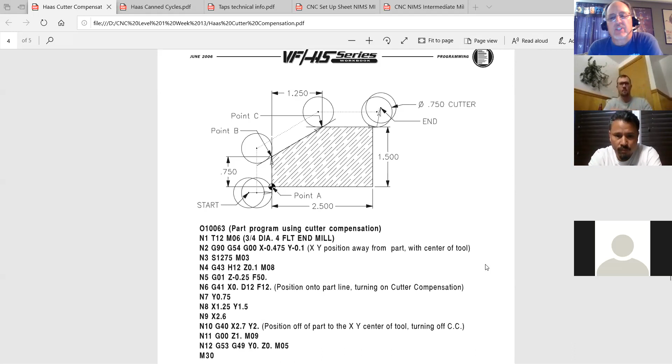Let's see, I think I have to stop sharing, which doesn't make sense to me, to share again. And it is this one. All right, do you see a print with some code on it now? Okay good, all right, so this is in that cutter compensation document, and this is an example of the cutter compensation.

So when we turn it on, this line N6, G41, that's cutter compensation left. They have an X move, so they're over here where it says start, and they go straight across. And then that's when it turns it on.

Notice the feed rate. A feed rate has to have a decimal point at the end because the feed rate's calculated in what's considered a 2-4 format. No, it's leading zero suppression, which means I don't have to put any leading zeros. So if I have nothing but F12, it thinks it's going at 1 2/10 thousandths of an inch per minute.

You're never going anywhere, at least not today. So you got to make sure you have a decimal point. A couple of programs didn't have decimal points here and there. It's just a habit. If all of a sudden you see it's going really slow, look for a decimal point missing.

So here, line 7, then they cruise around up, they go around. If we come around to line 9, which is where they're coming back, then line 10 here is where they're turning off cutter compensation and they make an X move and XY move. So they're coming off farther and turning it off.

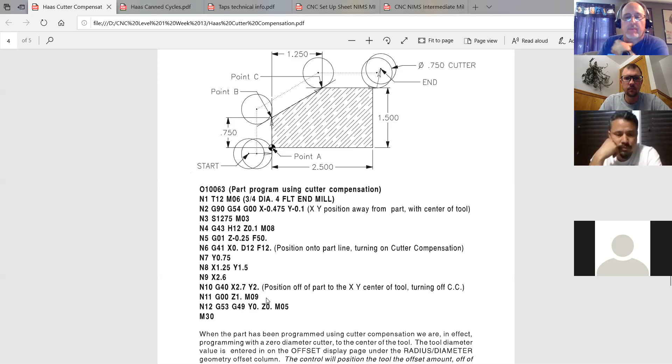So I just want you to be aware you do need to ramp it. It says down here, tool diameter must be entered in the offset. The control will position the tool.

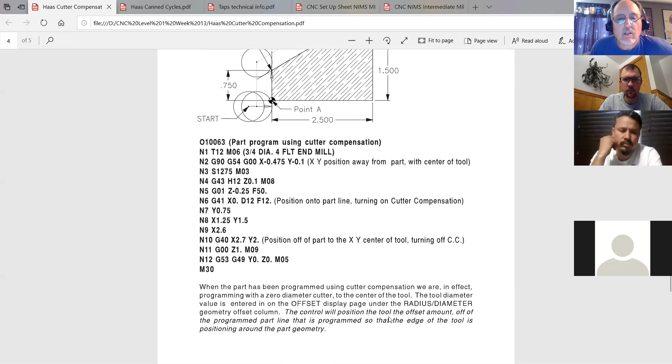No, that's not the one. Somewhere I saw a note that said something about a move. Which one was it? Needing an X move. Needs an X or Y move in order to truly shut off, especially if you're going to do multiple depths.

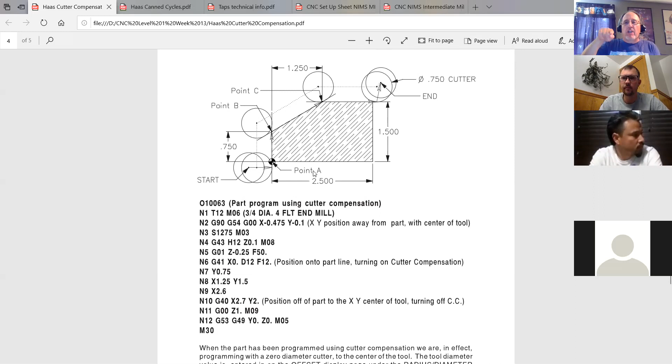I'm going to go around one time. Let's say the block is really thick. I'm going to rough it out in a couple of steps. I'm going to go down a half inch, then I'm going to go down another half inch. You can use the same program, but you have to come off cutter compensation, go back to your start point, ramp back on cutter compensation every time. Otherwise, it's going to give you a problem.

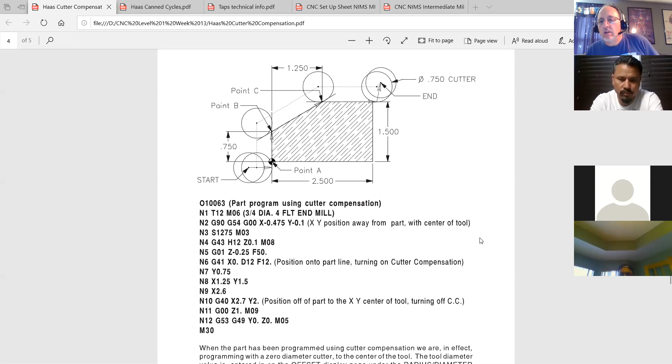Oh, I didn't know he was in the waiting room. Let's see. Okay, you're back with us? Yeah, I lost audio and my internet connection was, I think, going down. Well, it was good because it popped up on my screen that said you were in the waiting room. Yeah, so I ended up just leaving and reloading my browser. Sometimes that's the only way to go. But do you guys see pictures of you on the side of my screen, or do you just see the white screen? I see pictures. You do. Yeah, so when I see that, I don't really know, and it doesn't tell me who's in the waiting room.

So at any rate, the main thing I was trying to say was you need to make sure you have an X or a Y, or an X and Y move, on that G40 line to make sure that it cancels it out. So that's my main pitch reminder about the cutter compensation.

So if you're ever having trouble getting it to work on the machine out in the shop, look at: do you have enough room of a ramp to handle that diameter cutter? Do you have a diameter or radius, depending on the machine, entered as an offset? And did you call the cutter compensation the right way?

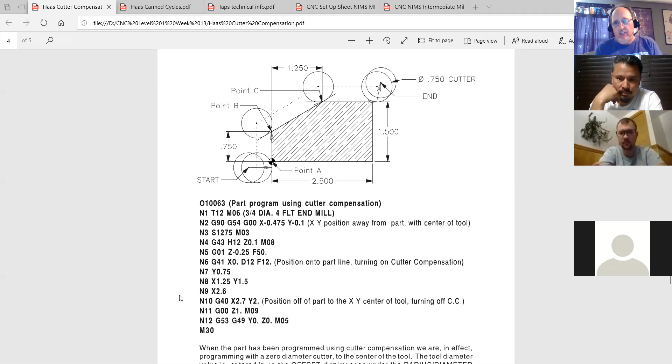Any questions on cutter compensation? Kind of makes sense. It's really, once you get the hang of it and you kind of treat it the same way all the time, it's usually fine. It's definitely better than programming without it.

Now, I will say that a lot of times on CAM software, you have the option to choose whether you want it to be compensated in the control or in the computer. And if you choose in the computer, it automatically shifts it based on the diameter of the tool you put in, and then it puts out those numbers based on that shift. The downside to that is it doesn't really turn on cutter compensation. And like I said, if I had a 1-inch end mill, I broke it, and all I have is resharpens now, my part's never going to be the right size unless I go back and fix it, because it doesn't have cutter comp.

I recommend cutter compensation all the time. But if your company does something different, then you go with that. All right, so let's talk about canned cycles.

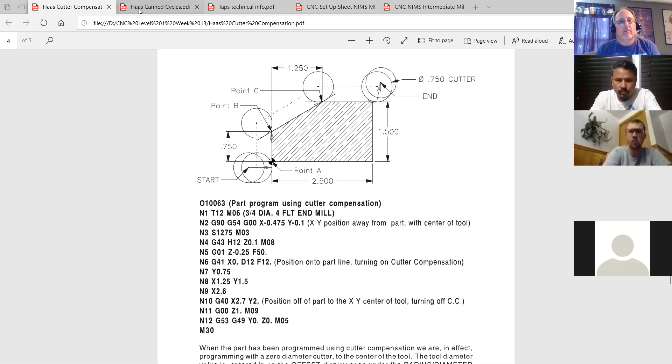So we're drilling, tapping, boring. Those are G81 through G86, the most common ones. G80 cancels it. And it really makes your life a whole lot easier. So basically, you're going to position in X and Y.

Looks like I was having a seizure there. I was like...

You're going to position above, and then you're going to come down. So typically, once you make a tool change, you want to make it a habit to position up above before you call out the G81 or G82 or G84, whatever you're going to do.

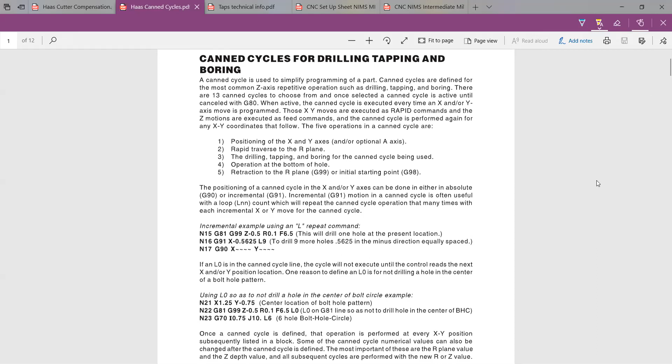So what I wanted to show you was there's G99 and G98. So when it comes out of the hole, depending on if I use the G99 or a G98 - and if you look at your book, I believe G98 is the default code with the asterisk - when it comes out of the hole, it's either going to go to the R plane, which normally you have like 100 thousandths above the part, or it's going to go to the initial plane.

So in this example here, line 15, G81, so it's a drill cycle. It's going to rapid to the R plane, which is R 100 thousandths. It's going to then feed at 6.5 inches a minute down to minus half inch. And when it gets down there, it's going to rapid back up to this R plane. If this was a G98, it would go to wherever my initial plane is.

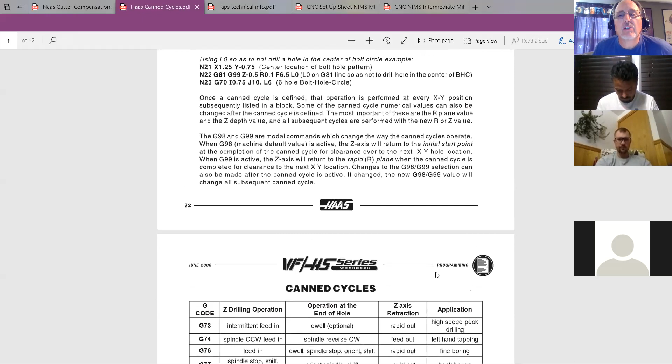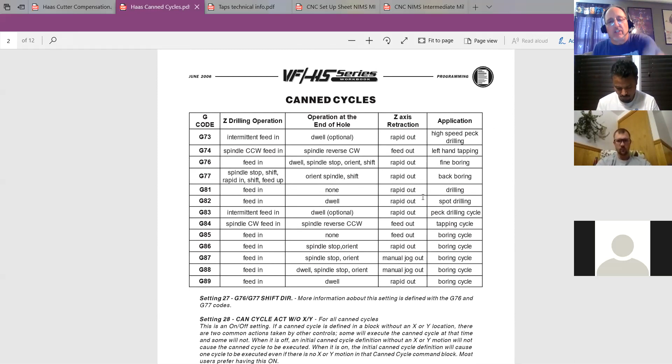Let me see if they have an example on that. Page 2 has a list of what happens when you pick that. G81 feeds in, end of hole, nothing happens, it just rapids out. So this kind of breaks down the parts of the canned cycle.

G80 cancels it. I'm looking for G98. Oh, here we go. Here's a good example. So G98 - now, G98 and G99 are modal, so they stay that way until you change it.

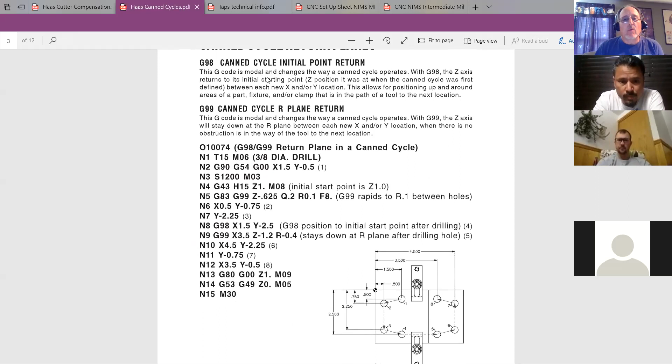So if you don't put one or the other in there and the default's G98, and when I come down, that initial plane is the first Z. So look at line 4: when you come down to length offset, turn on H15, so it's offset 15, 1 inch above. So the initial start point is 1 inch. That means if you have a G98, like there is on line 8, when it comes out of the hole, it's going to go to 1 inch above the part. Okay.

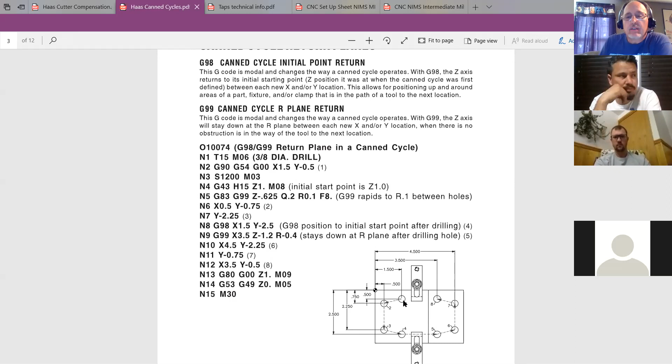If you look at the picture down here in the corner, my screen doesn't get blocked. There's a clamp here, and you can't always go around the clamps, especially if you remember when you're going from hole to hole, it's going at a rapid. That means it's going at a 45-degree angle until it satisfies one of them. So if I was going from the upper left-hand corner to the lower right-hand corner, it's going to go on a 45 until it satisfies one of them. So, to think that I can go from this picture of hole 1 to hole 7 or something like that, it's probably going to clip the clamp. So I would use the G98 so that I could jump the clamp. Okay.

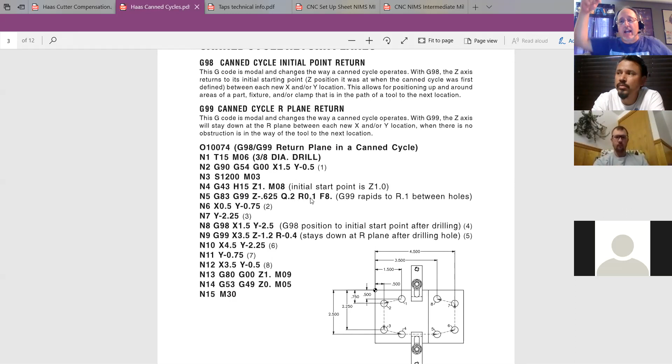As a rule of thumb, whenever you program, I highly recommend that when you pick up your tool length offset on the G43 line, you use 1 inch as your Z instead of 100 thousandths. What happens is it rapids to 1 inch, and even if I was drilling a hole right away, it's then going to rapid to the R plane at 100 above the part. So you're not feeding from that 1 inch above the part. It's not wasting a lot of time, but it sets things up so that if you need clamps or something, you can work around it.

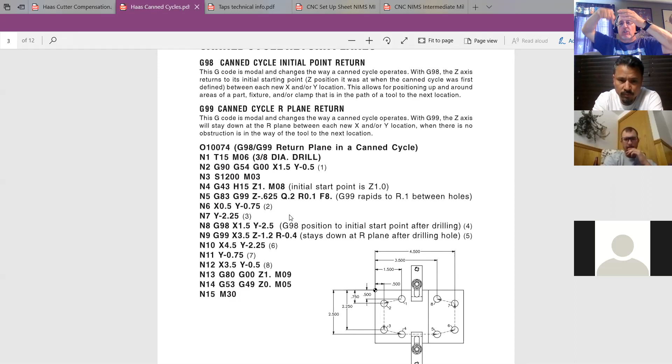Another thing is sometimes you have a pocket and you have to put holes in the bottom of it. You might want to use G98, that initial point above the part, but your R plane might be negative inside that part. So it rapids down, feeds in, drills a hole, and comes back up completely out of the part before moving to the next hole. There are a lot of scenarios where G98, G99 come in handy, but it all gets set up by this first Z move when you turn on the G43. Make sense?

Once you're in a canned cycle, G73 through G89 - 81 through 86 are the most common - every X move or Y move or XY move is going to execute the same canned cycle that you initiated, until you come down and give it a G80 to cancel it. So that means it's drilling a hole here, here, here, here, here.

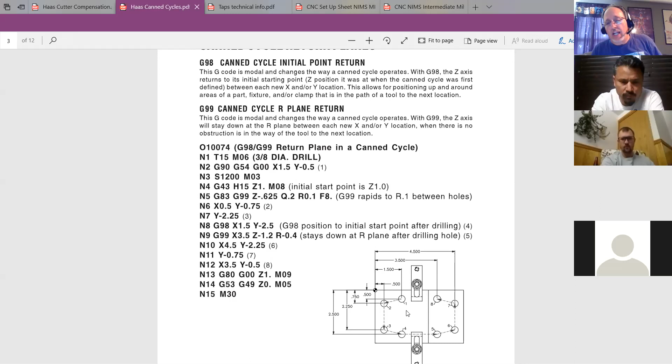Notice they changed from G99 to G98, and they numbered these in this example. So line N6 is hole number 2, then hole number 3, then they went to hole number 4, so that when it comes out of hole number 4, it's going to go up to the initial plane, which is 1 inch. So that G99 to G98 happens when it comes out of the hole.

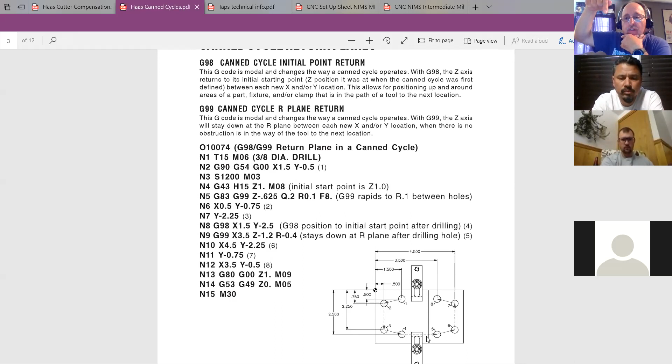Not going in, when it comes out. So on hole number 4, when it comes up out of the hole, it's going to go to 1 inch above, so that when it goes to the next hole, which they made a G99, at that 1 inch above it's going to go to hole 5. It's going to rapid down to the R, drill the hole, and come back up to the G99, which is the R plane - not up in the air. It's going to stay close to the part the whole way around. So that's how you use G98, G99 to control it.

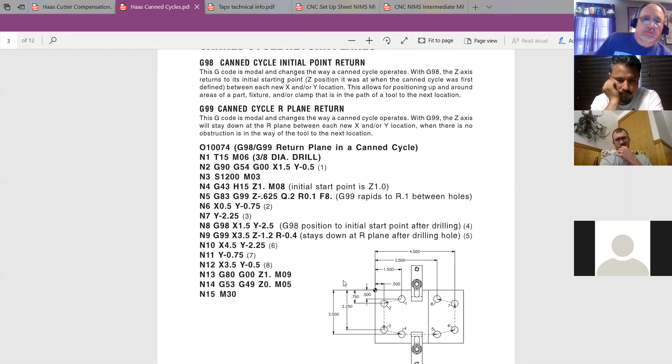Honestly, a lot of times you're only doing G99 because you want to keep it close - you set that once. But if you make it a habit to have the initial plane be 1 inch, then if something comes up and someone decides they have to add a clamp, you just add a G98 to the line and change that, and everything's happy. Make sense? Good.

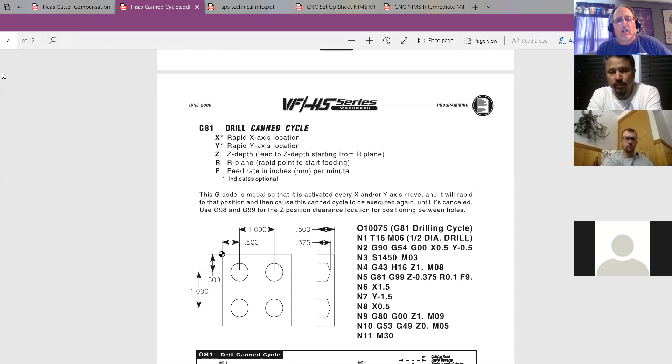So are you guys familiar with how the different G codes work? It's actually kind of like multiple steps all put together in a little routine.

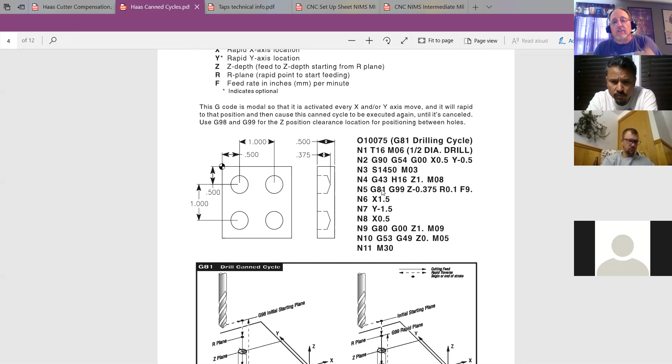If we look at this one, line 2, they positioned at rapid to X plus .5, Y minus .5 - that's where they're putting this hole. They turn on the spindle, rapid down, pick up the offset with the G43 to 1 inch above. They decide to use G99 on all the holes because it's all down. It drills a hole there, even though there's not an XY on this line.

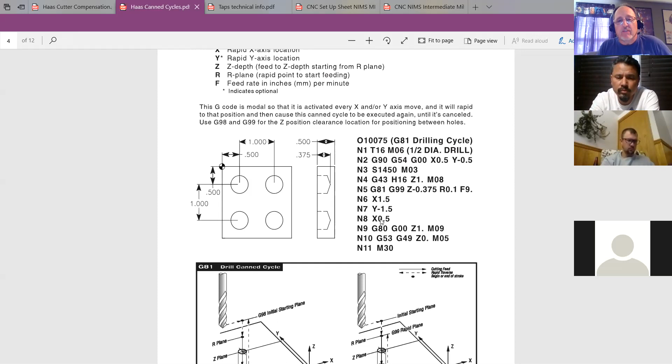Sometimes if you're writing manually, or even with CAM software, a lot of times it'll spit out this X and Y position again on the line because it pulls it - that's just the way it's written. You don't have to, because it's already at that position when you turned it on, but all the rest of them, every position, it's going to drill a hole. So if we look at this, let me see if I can make it bigger.

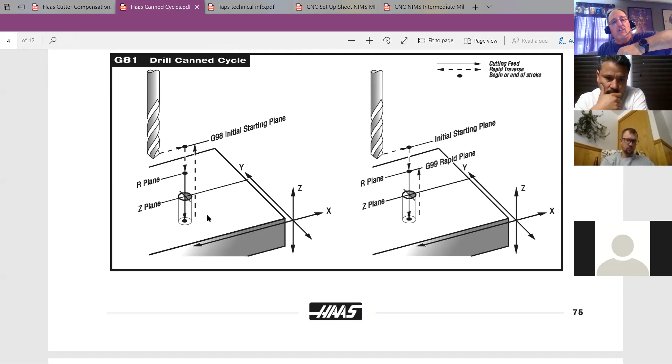If we look at this drill, here it's using the G81, a drill cycle, so that's just a straight down motion. It's going to the initial plane, which is 1 inch above, then rapid to the R plane, feed to Z minus, then rapid back up. In these pictures, the dashed lines are for rapid, and the solid line is for feed. That should help you out if you're looking at any of these later.

So it's rapiding over in X. This one rapids down to the R plane, feeds down to the bottom of the hole, and rapids back up to the R plane. Each one of these canned cycles has a little picture like this.

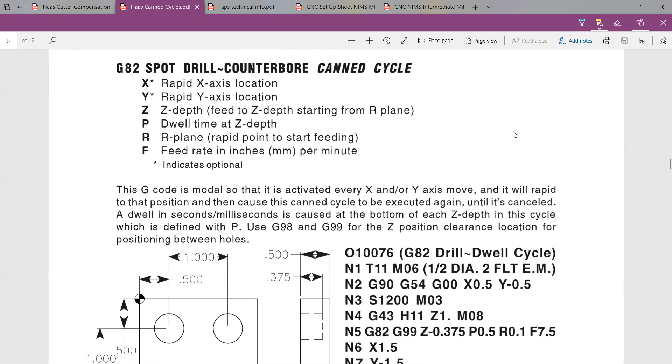G82 is a spot drill, which is basically just like a drill, G81, except there's a P. And that P is time at the bottom of the hole, okay?

So in this example, line 5, N5, G82, spot drill, it's at the rapid plane, it's going down. When it gets to Z minus 375, it's going to dwell for 0.5 seconds. It says a dwell up here is in seconds, milliseconds. So it's a half a second, it's going to sit there and it's just going to spin.

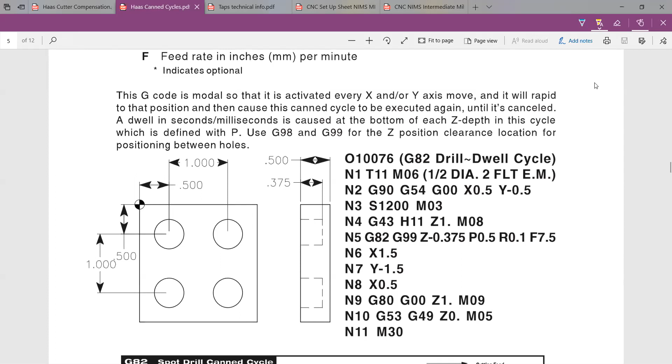Then it's going to come out of the hole and go do the next hole. And again, they kind of show us the same thing.

When you get to the G83, it can be simple or you could make it complicated if you'd like. Which, if I'm drilling, let's say I'm doing a mold and I got a water jacket and I got a really long hole, you know, that's 5-6 inches deep or something like that, I might use some of this extra stuff.

So normally you're positioning with X and Y. My Z is my final distance. My R is my rapid plane. My F is my feed rate. I can put a dwell in here so that when it gets to the bottom of each peck, it'll stay there. Usually I find that just makes chatter, which I don't want.

Q is the peck, equal increments, if I'm not using I, J, and K. So most of the time I'm just using a Q, and whatever my Q is, like 0.1, 100 thousandths, every 100 thousandths in Z, it's going to rapid it back out of the hole, rapid it back in just short, and feed down another 100, rapid out, rapid back in, feed some more. I'll show you the picture in the middle.

The more complicated version is if you add I, I can make my first peck bigger, and then J, I can make it less each time after that. As I get way deeper in the hole, I got way more stuff packing up on my flutes, so I may only want a 50 thousandths peck as I get really deep, but when I'm first starting out, I may want a 200 thousandths peck. So that's where you would get into those different type things.

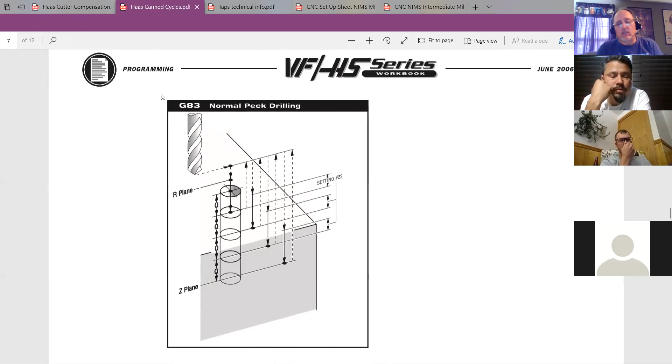So here's a picture of how it works with just a normal XY, going to the R plane and using Q. So here's Q. It rapids, feeds down the depth of Q, rapids back up, rapids back down just short of the hole. And over here it notes that this is setting 22.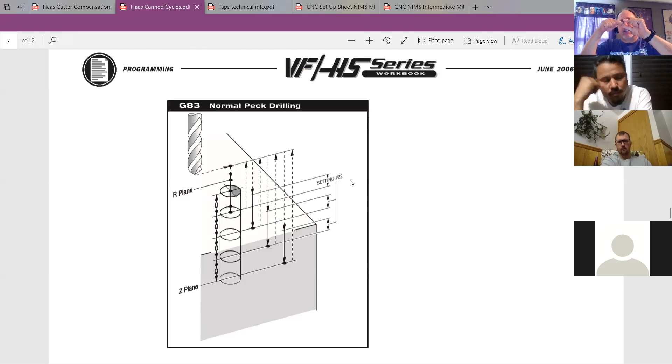So in your control, there's a setting page, and there's a number that's in there. There's a factory default setting. You can go in and change it, but that says how far is it going to stop before it gets to the bottom of where it left off drilling on that last peck. It might be 10 thousandths or 20 thousandths or maybe 50 thousandths, I don't know, it kind of depends. But that's just so that it kind of doesn't smash into it.

If you were doing a small drill, you'd end up breaking your drill. So each peck is going to go down to whatever the Q number is. It's going to rapid all the way out of the hole, rapid all the way back in, just short of where it left off, feed, rapid all the way back up. So that's peck drilling, sometimes they call it deep hole drilling.

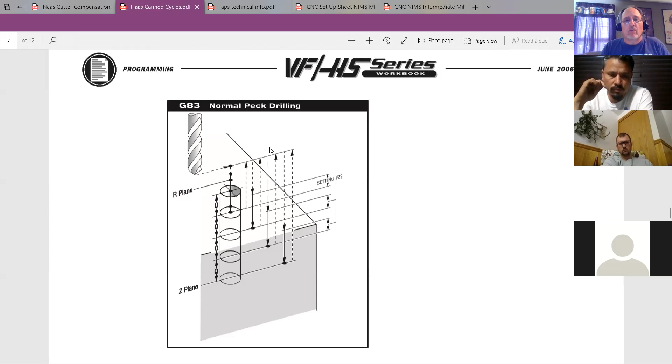There might be another option on your control that's called chip breaking, where it just kind of almost pauses - it's like e, e, e, e, e, e, e. It doesn't come all the way out of the hole, it just kind of pauses and keeps going down. Sometimes that's fine if you're not going really deep and you're just kind of blasting, roughing out a hole. That works fairly decent.

Okay, so I mainly want you to be thinking about using the Q when you drill. In our drilling exercises, don't go crazy unless you feel like you want to experiment with it. If you write the program in the NC viewer, it's not going to show you any Z. It really doesn't show you much, but you could look at it on your computers at work possibly.

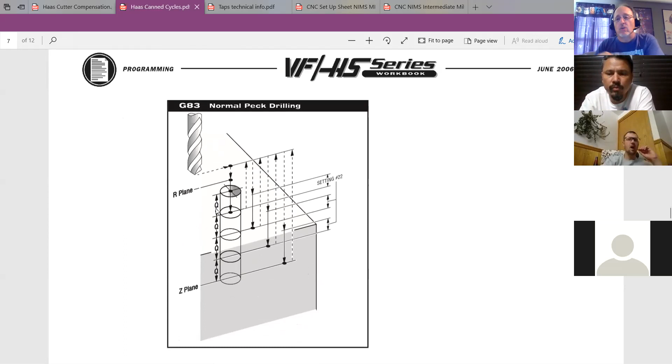So I would just worry about doing a Q. When you do pecking, you have to use the G83, right, instead of G81? Correct, correct. So G83 is the peck drilling, and you have to have a Q. You're still going to have your R, your Z, your feed rate, XY position, and then you need to have the Q. A normal size is like 100 thousandths, depends, you know.

And it's easy to adjust because oftentimes, let's see if they do it. Let's go back up here. Oh, we should go down that up. In the code, the G83 line here, number 5, they got a Q of 0.5, so a half inch.

But notice they don't have a Q on the next line. It's modal, which means it stays that way until you tell it a different number. Even to the next tool. The next tool, you call up a G83 again, it's still going to remember that Q unless you change it.

So the nice thing about that for this tool is, let's say I had 10 holes, but I only put the Q in line 1, this first line, and I go and figure out, holy cow, a half inch, no way, that's not going to work. The chips are way too big, they're flying all over, coolant's not getting in the hole, I need that to be smaller. You only have to go to this one place and change it. Whereas if you put a Q on every line, you'd have to change it every time. Does that make sense? You'd have to change it on every one.

Now, let's say I got a couple of short holes and then I have a long hole, okay? You may want the Q to be a little bit longer on the short holes, but when you go to a long hole, you may want the Q to be shorter so that it breaks the chip better. So let's say this next hole is longer. You can just change the Q, add a Q, Q.1 on this other line. It's flexible like that.

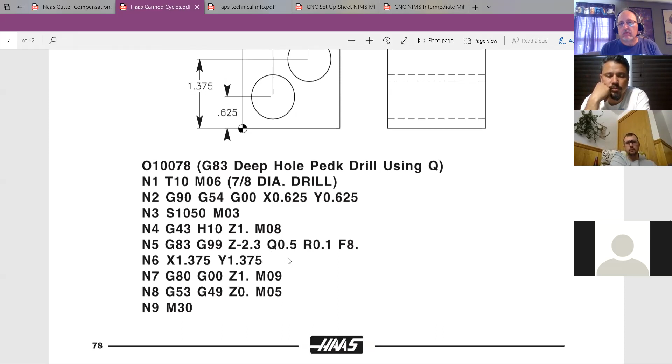Are we okay with G83? Makes sense? If you want to get into this other stuff, I'll let you go look into it. It's a little bit more complicated. You're going to have to read through it. But for the nuts and bolts about what we normally do, the G83 with the Q works very well.

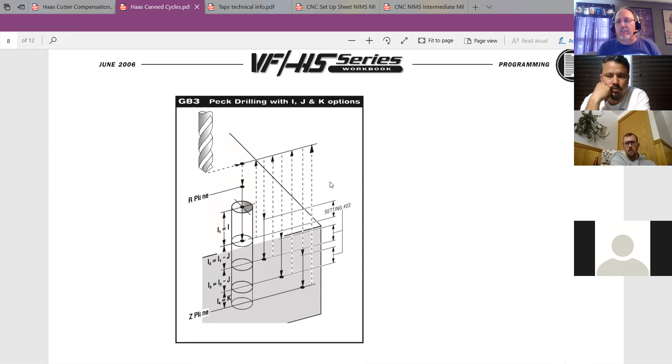Tapping. Let's see if I can minimize you guys. So tapping works the same way as far as an X, a Y, an R, a rapid plane, a Z, and a feed.

This J is kind of... I've never used J, I'll be perfectly honest with you. Okay, the tapping retract speed. So there's two kinds of, let me say, tapping modes on your machine. One, it has, let me stop sharing this for a second, just because.

Okay, so there's two kinds of tap holders. There's two kinds of tapping. There's tension compression, which is, I'll use my water bottle maybe, try. Here's my tap, okay? So there's a spring in here. And so as I'm drilling and tapping the hole, its spring can extend or it can push in, okay? The reason it was set up that way, old machines are that way because they are not as accurate about their feed rate, okay? So if it's not a perfect match in the feed rate, let's say I'm feeding too slow, it would pull the tap out a little bit instead of breaking it, okay?

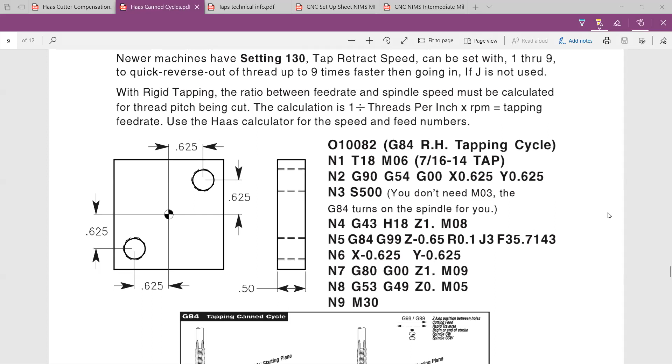Would you be getting your RPM from like the machinist handbook? Yeah, so yes, I would probably look at something for tapping, and it might say, okay, I've got a high-speed steel tap, 200 surface feet. I'd figure out as a quarter inch, 200 surface feet, then I would do the 1 divided by threads per inch times that RPM. Now, in every machine there's a maximum feed rate you can go, and it depends on the machine - it might be 30 inches a minute. I don't remember offhand if there's a standard number.

Either that, or you're going to go from the tap manufacturer. If it's an OSG plug tap, you're going to go look at OSG, and they're going to tell you what they recommend. One of those two sources would be the ones to get that info.

It kind of depends on your tap too, and I have a document that I've shared, and we'll go look at after this, about the different types of taps, because it makes a difference, because you have to determine how deep this tap is to go.

So if I'm drilling a hole a half inch deep, and let's say I want 3/8 thread, depending on the type of tap, I might have to make that hole like 3/4 of an inch deep. And if I can't go that deep because of the part's specs, then I might have to get a bottoming type tap, or one with little to no lead on the tap, and I'll explain that better in the next document.

But when you're tapping and drilling the hole to be tapped, you need to know how many threads do I need? I need a half inch of full threads. Then I have to calculate what my lead is, and then calculate some room, because most normal plug taps are going to push the chips into the bottom of the hole. So if it's a blind hole that doesn't go through your part, those chips are going to pack up at the bottom, so you want to leave some extra room.

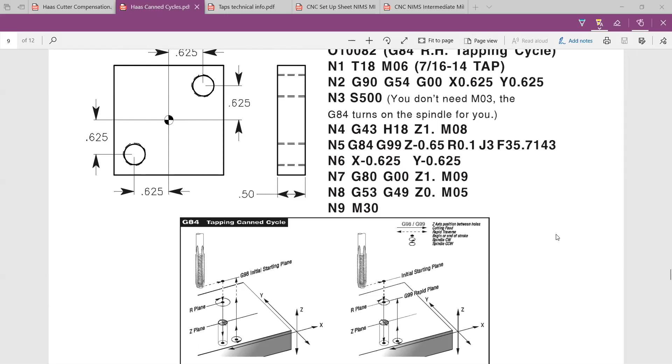So how this really works is this tap is going clockwise, M03, to the XY position. Then it's going to rapid to the R - can you see my little arrow guy? Yeah, okay good. And then it's going to spiral down, spin and move down in Z until it gets to the bottom of the hole, to the Z. It's going to then stop the spindle and reverse it to M04, spiral its way back out to the R plane, and then change the spindle back to M03.

So a couple of things. When I'm tapping a hole, if I put it on single cycle, it might have to push cycle start a couple of times because it might move to the XY position, then I might have to press cycle start again, and then it matches the RPM, and then I press it again and it spindles down and stops at the bottom of the hole, like it thinks that's the end of the block. It'll sit there - it's not spinning, so it's not a problem. Hit cycle start and it will retract back out and reverse the direction. So depending on the machine, it might break that one little cycle up into several chunks. Does that make sense?

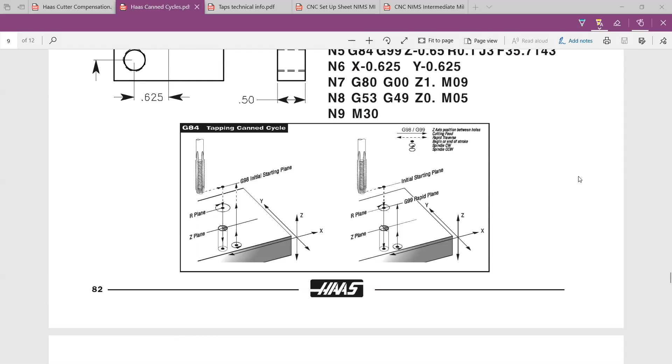One other thing - once you execute this G84 command, feed hold does not work. Feed hold, feed override, spindle override, none of it works. So let's say I've been running my spindle at 150% and my feed rate at 50% because my programmer doesn't know what he's doing, whatever - I'm not at 100%. When it comes to tapping, it's automatically going to use the numbers that are in the program, even if you really want it to be different. It locks those out - you can't override the spindle or feed rate in tapping mode, which sometimes is really good, because if you've been playing with the speeds and feeds and forgot to change them, it would for sure break a tap.

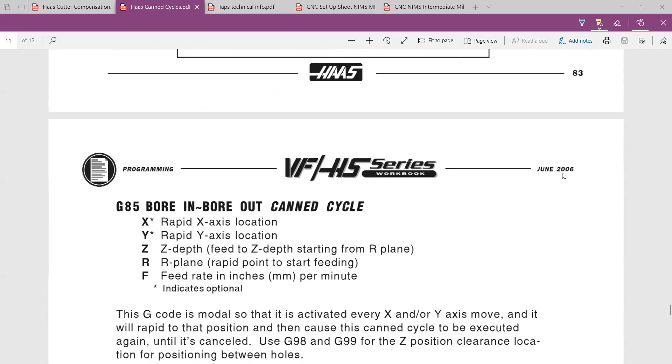G74 for left-handed taps, same process. There's a couple of different options for boring. Here's one, it's bore in, bore out.

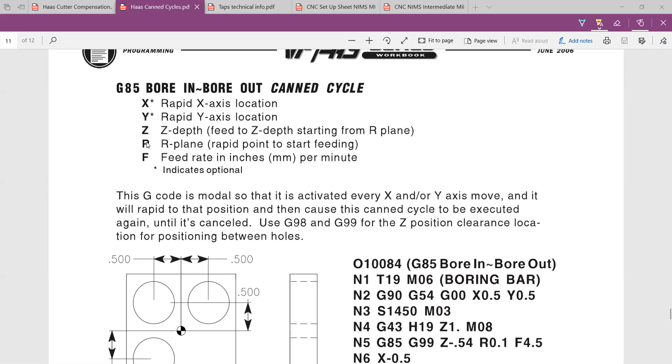So it's going to bore in, same thing as a drill, X, Z, F, R, okay? It's going to feed all the way down, and then feed all the way back up. So it's going to bore itself in, bore itself out at the feed rate.

G86, what's going to happen? Oh, this is still the G85 - it feeds in, feeds all the way out. G86, it bores in, stops, rapids out.

Sometimes, if you cut it again with zero tool pressure, it sometimes does weird stuff, depending on the material. Other times, maybe if you got a super hard material, you may want to bore in and bore out to make sure there's no tool deflection. That's a preference or an experiment.

So those are the main ones. There's a few other boring options, and they're in your book, and you can look at them. They're also in the full-blown Haas manual that I gave a few weeks ago. It's up there, and I'm not taking that stuff down. So even after our class is done here, you'll be able to go and get that stuff. But I would pull it down as PDFs and save it so you don't have to go there anymore. Anyways, it's less convenient. So, questions on canned cycles?

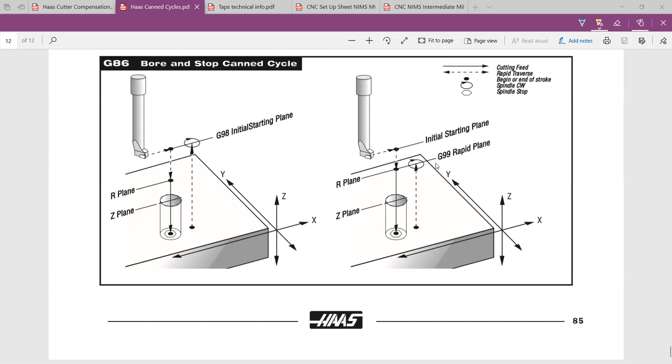Okay, so let's look at some of this technical info for taps. Let me see if I can make this big enough to actually see. All right, so there's a number of different types of taps.

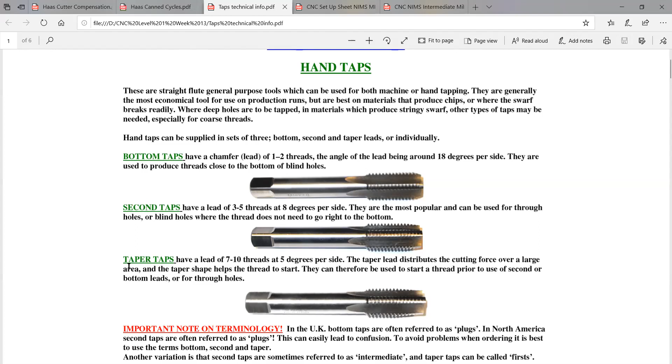So there's a bottoming tap, the chamfer on the bottom here, or the lead, they say is 1 to 2 threads. A second tap has 3 to 5 threads. Tapered tap has 7 to 10 threads that are lead.

So if you look at this, it's kind of hard to see maybe, but those aren't full threads. So what they're saying is the first, in this particular one, 7 to 10 threads aren't going to make full threads. So if I were to screw a thread of screw into that hole, that screw is going to stop somewhere here. It's not going to make it down to here.

It's going to get closer to the bottom on this one. So sometimes you're going to tap a hole with something like this, a plug tap, a regular standard tap that has a bunch of lead like this. And then you're going to hand tap it off onto the side because you got to get down to the bottom and you don't want to risk busting a tap.

Now these are hand taps. Machine taps work kind of the same way. We've got a spiral point or a plug tap. Does it tell us how many threads? I don't see it.

I think in the machinist handbook or let me see real quick on the Haas. Oh, remember when we were talking about threading with the G84 on tapping? And I said that it's 1 divided by threads per inch times the RPM. If you're doing, so 1 divided by threads per inch, let's take the 1/4 20 tap, 1 divided by 20 is 0.05. That's the pitch.

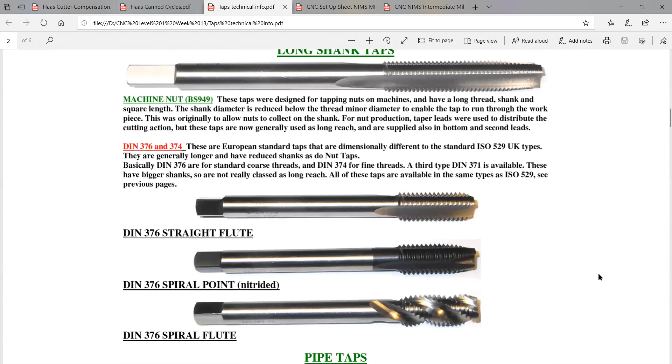But you've got to have different size drills that affect this. But roll thread taps are useful. Long taps are the same thing, just different sizes - they're just longer. Pipe taps - you could have a straight pipe tap, or you could have a tapered pipe tap.

They could have different coatings, like these in the pictures, like a nitride coating. Depending on the material, you might want a certain kind of coating on it so that aluminum doesn't stick to it and build up and cause problems in your threading. Titanium nitride coating, kind of the same thing.

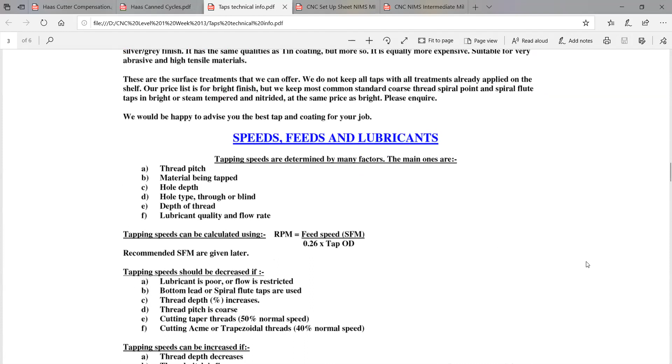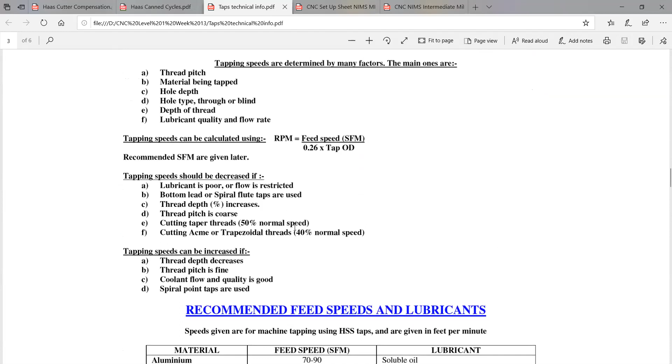Here's some info about RPM or tapping speeds to be calculated, surface feet per minute. I don't know whose chart this is, to be honest, but here's some examples of surface feet per minute for the different types of material.

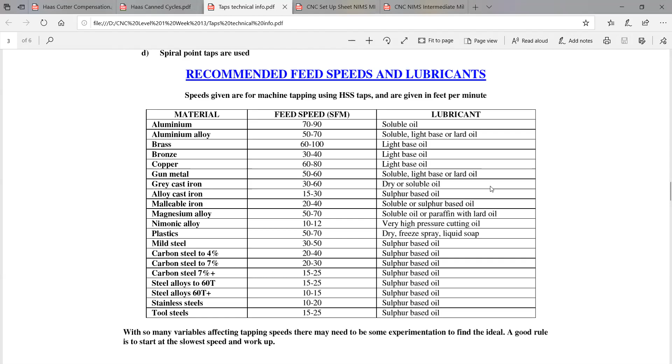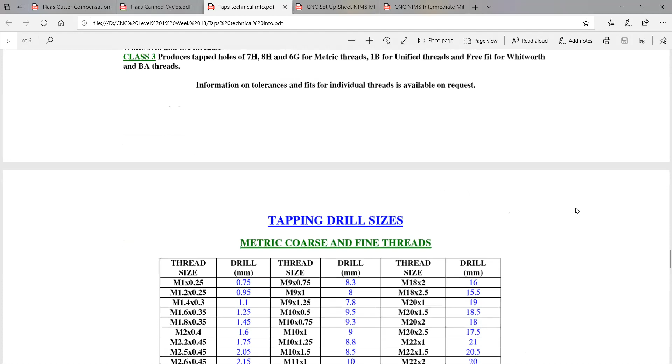Some troubleshooting, some tap terminology - I'll let you guys study it when you're interested. Metric tap size. There's some tap charts tied with this too, which I had forgotten about.

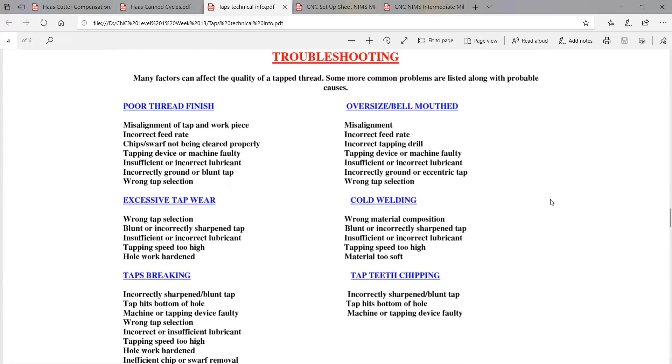Questions on taps? That's a nice handout. Yeah, that's not too bad. There was more in there than I thought. I thought it was just this, so I must have gone and found some more stuff and put it together - I have a tendency of doing that. Maybe not, but yeah, I like this one. There's a good amount of information. Yeah, there's some decent information in here. So that's free.

All right, so if we look at this - most of you, or many of you, programmed this outside shape. If you didn't do that, you might want to work on that. What I would like us to do this week is drill and tap these holes. If you get that done, you might want to slot this out, and we'll talk about that in a minute.

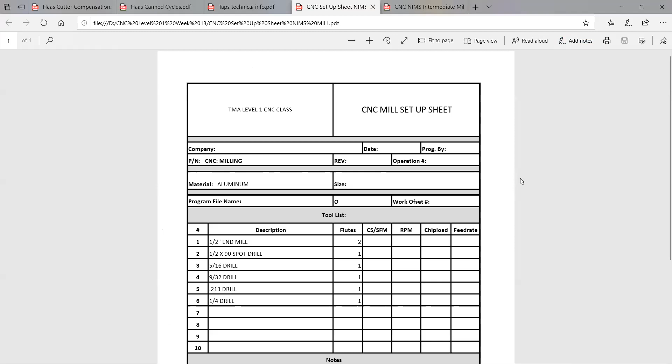So these holes are listed over here in the chart on the side. Typically, one way or another, you should be making some sort of setup sheet - plain, like just a list of tools on a piece of paper like we did on the lathe, or something more official. If you're a programmer, you should come up with something formalized and consistent so your operators can get to know where to look for information.

So that they're not losing a lot of time on the floor trying to figure out what the heck you're doing. Okay, so this is one Titans of CNC has - I downloaded it and modified it to use with my students at school, so I just took my school logo off and did it for us.

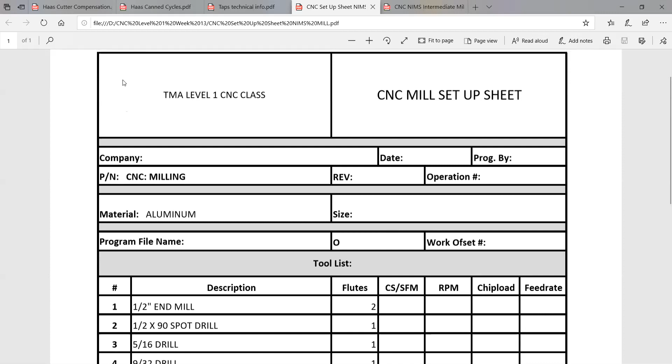The reason I did this is because if we're milling - let's mill with the half-inch end mill around the outside, we're going to use a half-90 spot drill. Anytime you can, use a 90-degree spot drill, and the reason is because whatever diameter you want, the Z is half that amount.

So if I've got a 250 hole that I'm drilling, you really should be making a spot so that there's a countersink, so I don't have to deburr it later. I don't like to work more than I have to. So I'm going to program that to maybe be 280 diameter.

So my Z is going to be half of that, 140 deep. If I use an 82-degree spot drill or something else, you'll want to consult your Haas handbook to figure out that distance. But with a 90-degree spot drill, it's nice and easy - the Z is half of the diameter I want. That's why I said 1/2-inch spot drill.

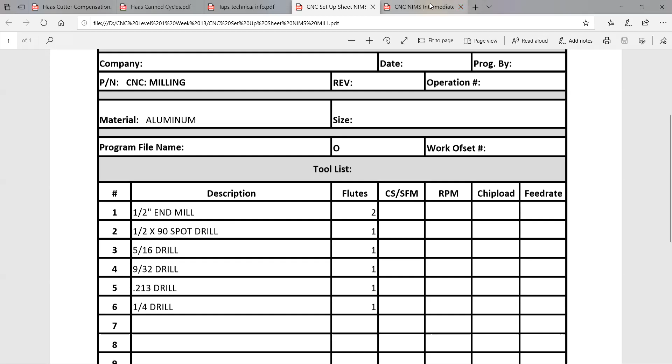We're going to use a 5/16 drill. Now, I'm going to be honest with you - in reality, if you look at these tolerances, hole A, 312 plus or minus 2 thousandths, you're not drilling that with a drill blasting in there one time and holding plus or minus 2 thousandths tolerance on the diameter. That's probably a reamed hole. Same thing with the 281.

But for our purposes of programming, I want you to use a peck drill, G83, to drill these holes. Just drill them. Now, since I mentioned ream, let's say I drill this hole - I would probably drill it somewhere around 300, whatever size that would be, and then I would ream it.

Now, if I ream it, I would use a G81 cycle - drill in, rapid back out. When you ream a hole, since you want it round and smooth and a consistent size - using a reamer to true up a hole and hold tight tolerance and size - you're going to go with a lower surface feet and a higher feed rate, because you want it to go in and cut and come out, not just rub. You want to make sure that reamer's not wobbling, because if it's wobbling, it's going to cut oversize.

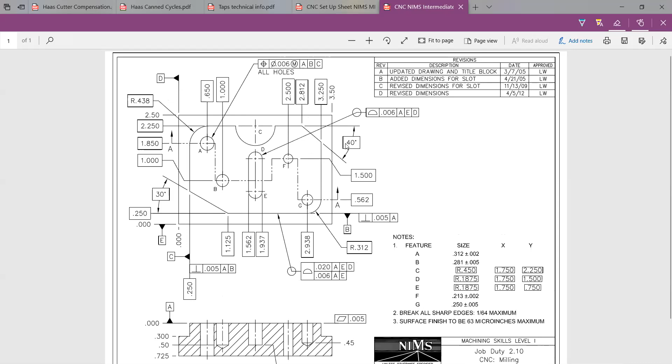Are you guys familiar with geometric dimensioning and tolerancing at all? GD&T? A little bit. Like this stuff that's on this print - let me make it a little bigger here. Do you know why these dimensions are in a box? And not all of them are. So here's one that's not in a box.

So I'll touch on this a little bit. GD&T is like a whole other language. Okay, so we look at our print - I have tolerances down here in the bottom. Two places to the right of the decimal, plus or minus 10 thousandths. Three places to the right of the decimal, plus or minus 3 thousandths. So this 0.45 right here is plus or minus 10. Over here on the left, there's 0.300, plus or minus 3.

If a dimension is in a box, that means it's a basic dimension, which means these tolerances don't apply - it's saying those tolerances are modified. So I have to look at the whole callout over here to get my tolerance. Usually it's making the tolerance smaller or connected to some restrictions.

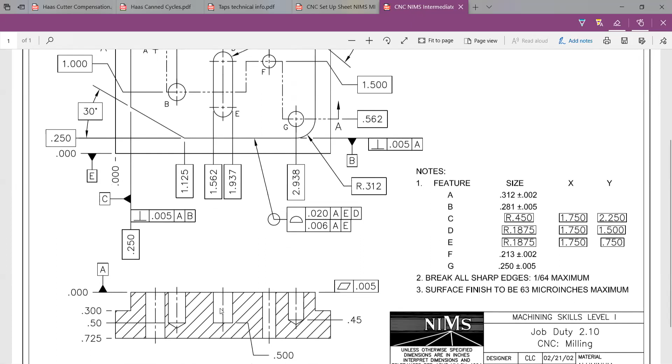You've probably seen parallel and perpendicular callouts quite frequently. It's just some of these other ones you don't always see. Now, just going to mention this - we're not going to get into it, but this little M in a circle is called maximum material condition.

So if I have a hole, this hole A has a ±2 tolerance. On that hole, what size would the hole be if there was maximum material in the hole? 310. Smaller.

So why can't I move? Okay, when I am at 310 diameter, I have 6 thousandths. When I'm bigger, 312 or 314, you have a different amount of tolerance. I think they call it bonus tolerance. I don't want to - that's a whole nother world I really don't want to get us into.

In fact, I was taking a class totally on GD&T - it's overwhelming. And TMA, by the way, if you need to get into that, I know TMA every now and then runs a GD&T class on like 2-3 Saturdays every now and then. But anyways, I just wanted to mention that about some of this stuff because a print like this can be overwhelming, especially if you don't understand these things - it's going to be hard to make it in tolerance and not get rejected from inspection.

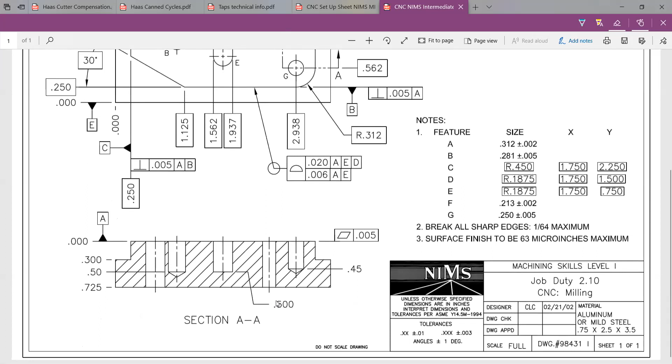Now this thing's going to go a half inch deep into the part. Even if I take multiple steps, how straight and nice do you think that would be if I used a 3/8 cutter to cut that slot? Do you think it would be straight and in tolerance? Think about tool pressure.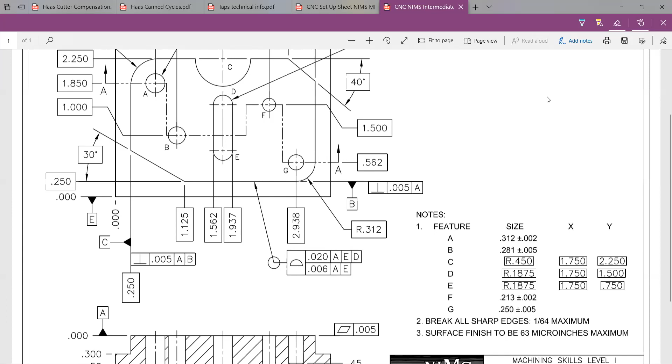Have you ever noticed when you cut full diameter of the cutter that it kind of walks off one way or the other? Yes? Have you guys noticed that at all? It will. So in this particular slot, you really can't go full-size cutter - you've got to go with the smaller cutter.

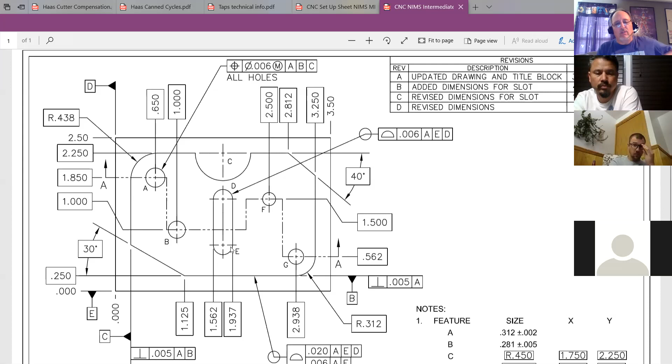And since in this particular case I have a really close tolerance - this is the profile of a surface, that's the whole surface up and down and all around - it has to be within 6 thousandths to A and E and D, to this end, and A I think is the bottom, or the top surface, sorry. So it's kind of ridiculous, to be honest with you. I think it's pretty ridiculous.

This is the part my students have to make to get NIMS certified on the CNC, okay? But the way to make this slot, or anytime you're going to want to go with a smaller one, you can rough it and then come back and do cutter compensation. Does that make sense? That way, if the tool deflects a little bit, I can clean it up when I come around after the fact.

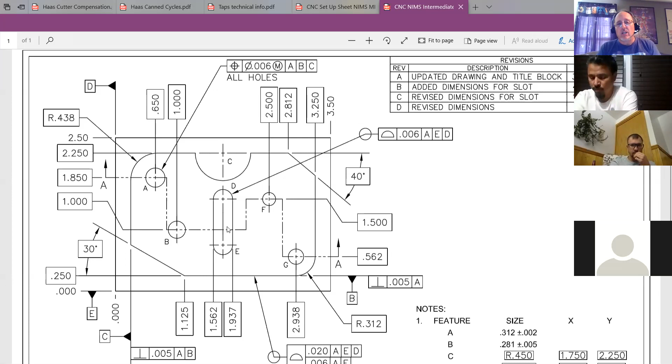So in this particular slot, I would say that you need to go in with a 5/16 end mill. I wouldn't want to go smaller, because if I go with a quarter, that's pretty small diameter for the depth, and it's going to be a lot of deflection. It's going to move a lot on me, maybe even break.

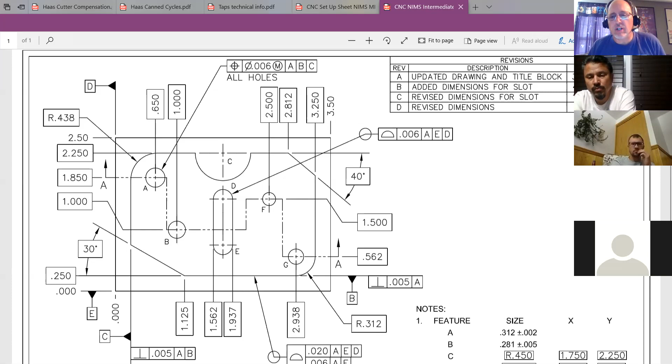So here's what I would suggest for that. Let me unshare so I can show you something else. I've never tried this before, but let's see. Now supposedly I can write - not sure how. Spotlight. Draw.

Okay. Oh, no. Sorry about this, it's pretty crummy looking.

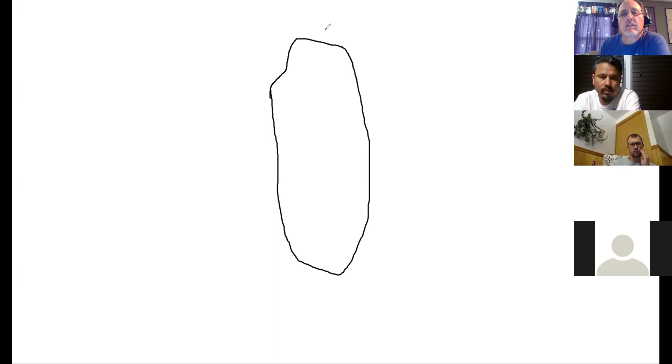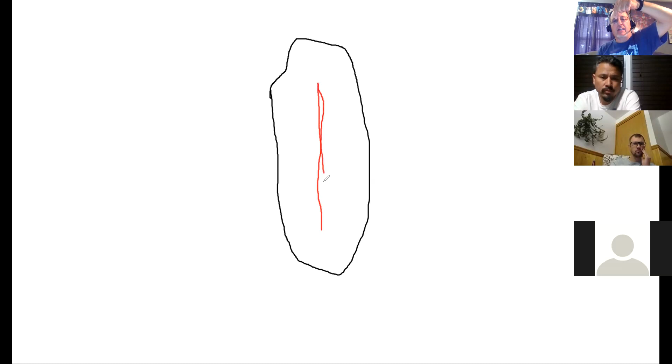If this is a slot I was trying to machine and I wanted it to look really nice, I could come in with a cutter right at the center, a smaller one, and go straight up, then go down a little bit farther, come back, go down a little bit farther. So I could do it back and forth in a couple of steps.

Okay, now I've roughed it out. If I'm using that 5/16 cutter and its finished size is 375, that leaves me 1/16 total, or 30 thousandths on one side, 30 on the other side. So that's perfect. I could come in here, drive around the outside with cutter compensation, and it's a wonderful day.

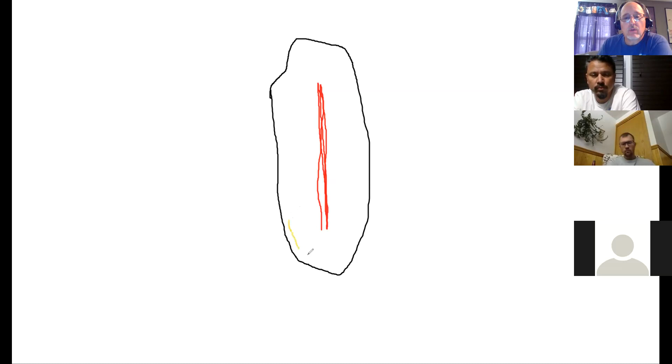Except, if I tried to bring my cutter, which is almost as big as the slot, how can I ramp on? How can I ramp off? Because remember, it's got to move over enough to compensate, to offset.

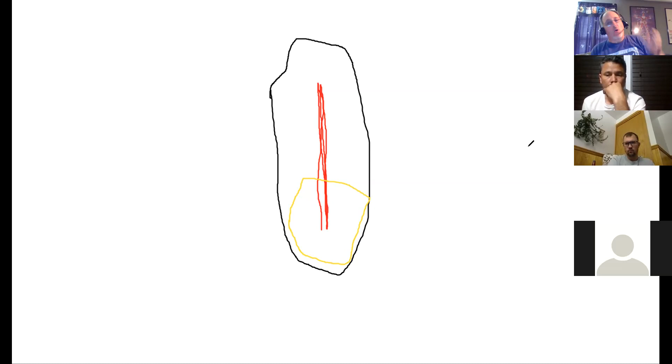So whether you use this here or you use this someplace else down the road, I want you to just kind of store this thought: there is nothing in the rules of cutter compensation that says I have to be in the part at my full depth when I invoke my cutter compensation ramp, when I turn it on.

So every arc has a straight, so I would say my arc is supposed to go to here, then I have a straight line, then my arc. So these lines are like my change from straight line to arc, okay, because my drawing is so crummy.

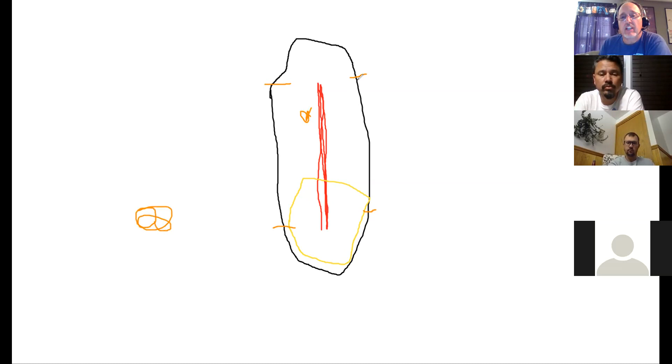So if I'm going to do cutter comp left, I need to be able to come from this side over here somewhere so that I can be on the left side of the line at this point.

So I can come up here above the part, 100 thousandths above the part, G41. Turn it on, G41's in place, puts me here, then feed my Z down. Then I can walk around this, back to this. I can feed out of the part, and then I can ramp off with my G40.

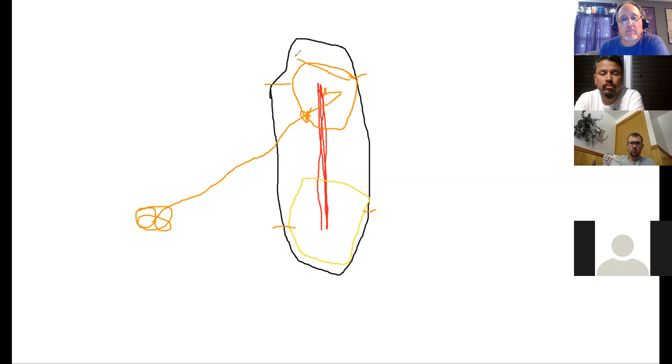Does that make sense? So I'm doing it up in the air: ramp, go into my part, cut my part, come out, cutter comp off. There's going to be some times where you just flat out don't have enough room to get the ramp, okay? And you might need to do that above the part, ramp on, ramp off, or ramp on, cut the part, come out of the part, ramp off.

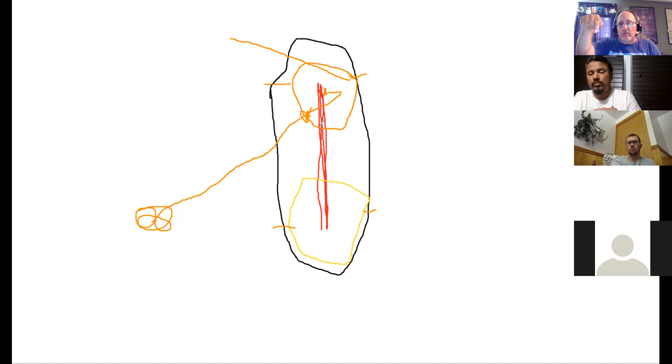Does that make sense? Yeah. Okay. Well, most of the time we don't think that way because we think, oh, I got to get in here, I got to be down inside here, and there's not enough room.

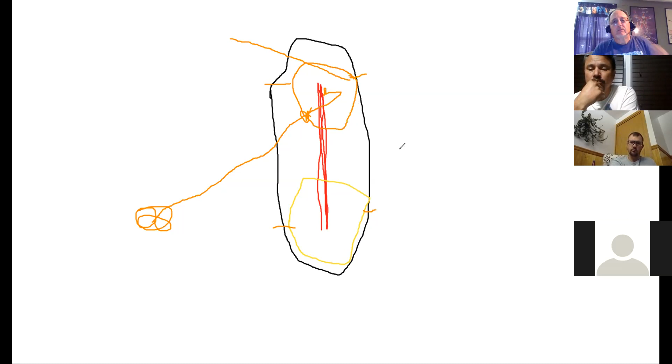Okay, so I'm going to get rid of that terrible representation. I didn't think about it until right when I was talking to you. Otherwise, I'd have drawn it up ahead of time like I did the other stuff, and it's much nicer looking. So at any rate, that's kind of what I have going on for us to talk about. Does anybody have any questions on anything?

Okay, so what I would like you to do is on the part that we programmed last week, if you didn't do the contouring and you need help, ask. If you did that, drill the holes. And if that comes pretty quick, honestly, once you do one hole, you can copy the meat and potatoes part of it, paste it, change your tool, your height offset, XY position, leave the rest the same.

You're going to have to change your Z. But you know how you have the lines going up to a tool change, the start and the spindle, that's kind of the same stuff. You can copy and paste that.